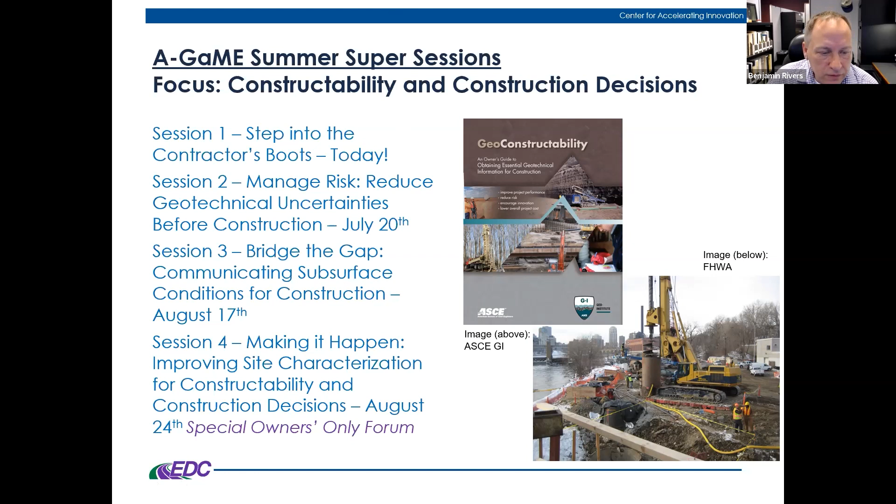So what to expect today? Today, oh, we have one more note.

Recognize that we are having a discussion during this first session, and all of the comments and opinions that we share are from individuals, right? So the viewpoints expressed are of those individuals, and they're not necessarily represented or representative of FHWA or the contractors that are talking here. So we're having a discussion, and just realize that these are opinions and thoughts from individuals. This session is also being recorded and will be available for future viewing.

So today, I think we had a missing slide here. Yeah, so, what to expect today. We have a great lineup of speakers here. Be thinking about these topics as we go along here.

We want to gain a perspective or an understanding of the contractor's perspective on geotechnical related issues, on the A-GaME concept, and what information is important and what problems our contractors experience. We're going to be talking about risks and decisions that are being made from the needs for bidding and construction decisions, looking at the A-GaME, the fundamental part of the A-GaME, which is reducing risks by characterizing conditions better before construction and not necessarily transferring them. That's going to be another point to look for in our discussions. And finally, the value that the contractors bring to us, their experience and insights that we can tap into. Be looking for that in what you see and hear from our speakers today.

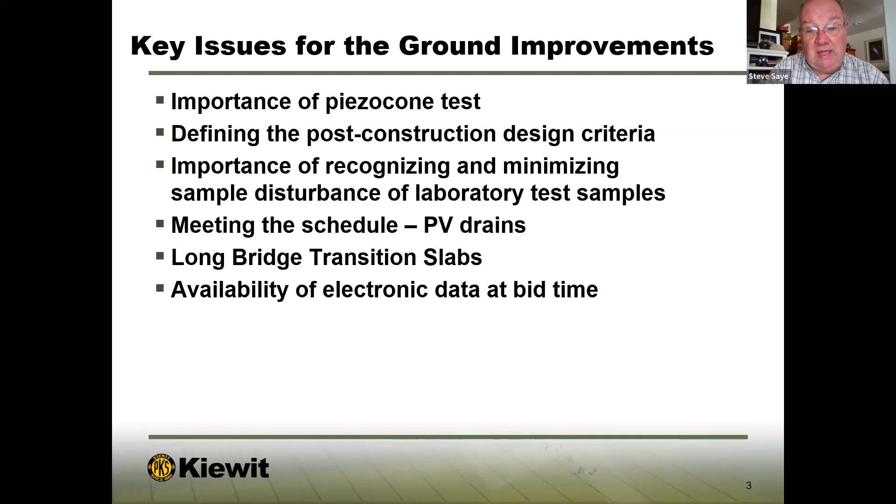In the time that we have, there's a series of things I hope to convey. The first is the importance of the piezo cone test in soft ground projects. The importance of defining what we think the post-construction design criteria would be, to guide the pre-bid evaluations and the final designs. A bit of discussion regarding sample disturbance and how important that is on soft ground projects, and recognizing that a key component of meeting the schedule was the use of prefabricated vertical drains, or wick drains. We'll talk a little about what we learned there. An issue, particularly from design and construction, about the long bridge transition slabs we had, and then a final discussion about availability of electronic information at bid time.

In the 1960s, UDOT essentially raised the interstate as it went through most of downtown Salt Lake City. The construction efforts were to both raise the existing embankments and widen them. And that had the challenge that we knew we were going to need to force more than 1.5 meters of settlement during the construction period.

UDOT, I think, correctly identified that the design build contract was the best way to reach those challenges. And from my perspective, we used the piezocone extensively, and it had the advantage of providing nearly continuous data profiles.

25 years ago, we used it to try to assess selected geotechnical properties. Today, we would use it to do more, and I think the A-GaME is focused on trying to do more with that data. We used it extensively to both supplement and extend the available lab data. And then the local geotechnical engineers taught the team how to easily identify the soil stratigraphy to understand what the critical units were.

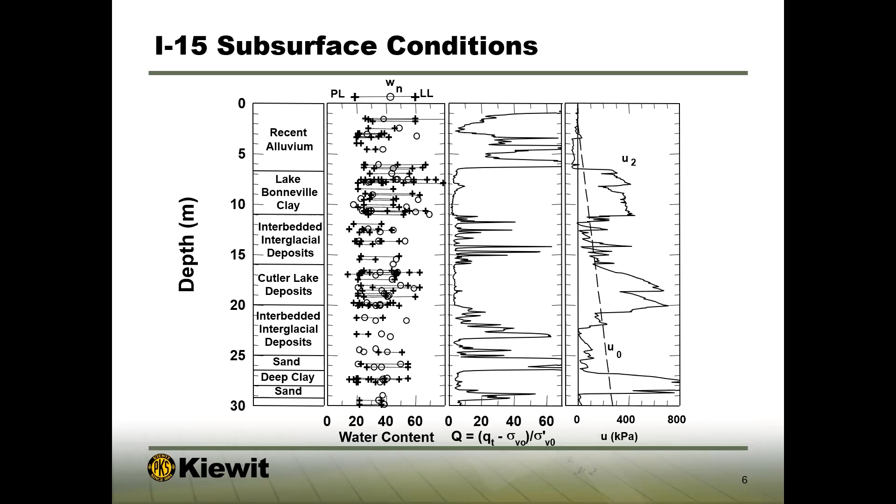So, yeah, in this particular issue, we can see the cone data in the right-hand two columns, the myriad of data for the conventional index properties, and then the word descriptions and the geologic materials in the left-hand column. For our particular project, the Lake Bonneville clay and the Cutler Lake clay deposits were really the bad actors that drove all of the concerns for stability and settlement through the project.

You can see in the interbedded interglacial deposits the spikes of the Q values that are indicative of sand layers and silt layers, and how they might be important to our understanding of the behavior of the wick drains. The other point I would make, something Kiewit generated, is that in the soft ground projects we developed what we thought were the post-construction settlement design criteria.

We developed the post-construction settlement design criteria that we were going to use as a basis for our calculations and designs. That was our method, as the design builder, to communicate to the owner the expectations of the settlement calculations and what we were striving to do.

In those instances, the feedback from UDOT was that the bump at the bridge was considered a critical condition, certainly for the long-term settlement. We had a defined maintenance period of 10 years. So we worked with UDOT to identify an allowable bridge settlement of 51 millimeters, and the roadway adjoining the bridges of 75 millimeters.

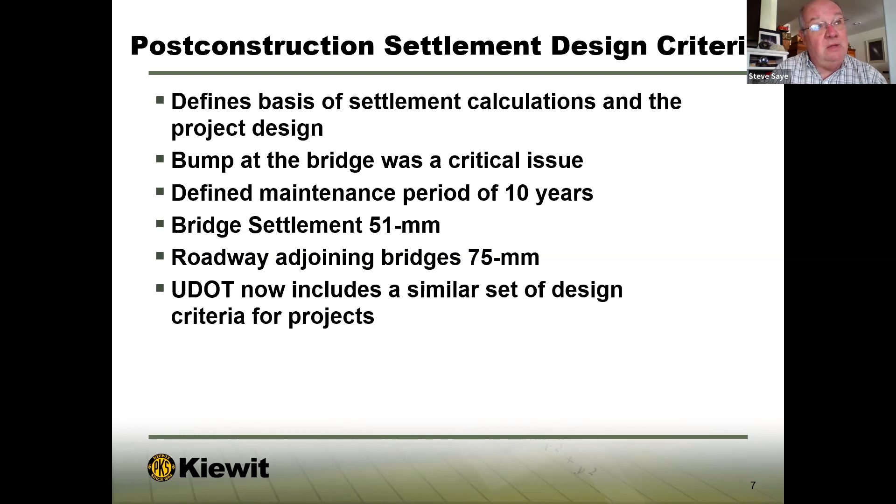Grant Gummow at UDOT was part of our design team, and he's taken this approach to UDOT. In their design build projects currently, we'll see a similar set of guidelines where the owner will establish expectations for the ground improvement designs: amounts of settlement, distribution of settlements, and specific time frames. That's certainly something that grew out of I-15, and we believe it's appropriate for owners to use in all ground improvement projects, being able to communicate the target values for those designs.

An important part of the I-15 efforts was that most of the engineering calculations we did involved consolidation properties: the amount of settlement, the long-term settlement, the rate of settlement, and those inputs to the calculations were all based upon the laboratory test results that we had. Certainly with the fixed completion date, the rate of settlement and the corresponding durations of settlement periods to force this 1.5 meters of settlement out during construction was key to understanding the schedule.

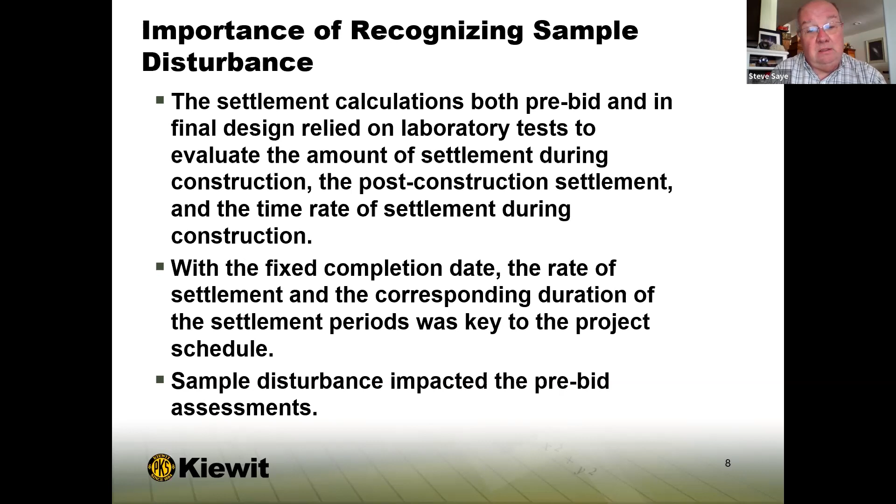And yet, as we dug into that, we found that sample disturbance was a real impact for those pre-bid assessments.

And what I mean by that is we used at that time the Norwegian Geotechnical Institute approach for looking at settlements, essentially looking at the strain we measure in the oedometer test as you're loading it up to the effective overburden stress.

The left-hand sample is what we would consider a bad sample, we're seeing strains of about 7%. On the right-hand side we would have a good sample, with strains of about 2%.

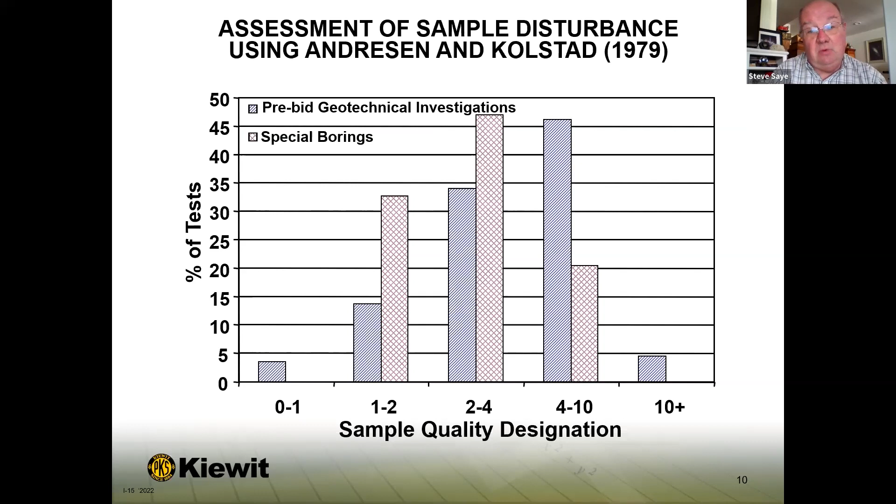If we went back through the boring and laboratory data we had at bid time, you can see from this graph that almost half of the samples would be discarded using a criterion of 4% strain. This particular graph shows that we tried to improve things during the bid or design phase, and we still had a failure rate of about 20%.

In that effort, we would say it's really difficult to develop reliable assessments of settlement properties if the laboratory samples are disturbed. You're probably going to get a picture or appraisal of the ground conditions that's too pessimistic, but you're not going to make the right decision regarding settlement problems.

So I would suggest that every project include an assessment of the issues of sample disturbance, and in some cases non-standard approaches may be necessary to be able to get good samples.

An example is the work we've done post-Katrina for the recovery of New Orleans. The New Orleans District of the Corps came up with a system of 5-inch diameter Shelby tubes that they push continuously, and those rank as probably the best samples I've seen in routine practice. Certainly in New Orleans you need good samples through there.

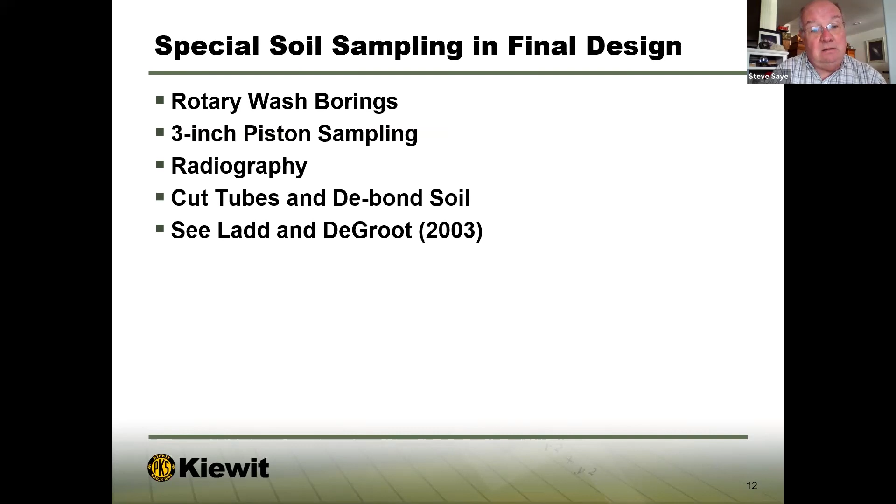MIT has a system of cutting the tubes and debonding the soils, and I would look to you to have a reference - Ladd and DeGroot. These references are attached at the end of the slides as probably the standard of practice to get good samples for testing.

The other thing I'd have you understand is this project was unique in that we had a fixed completion date. We didn't have the opportunity of completing the project 6 months later because the settlements went on too long.

From the experience in the 60s with displacement sand drains, clearly vertical drains were going to be needed if we were going to drain the water out properly. The 60s constructions had settlement periods of 500 to 1,000 days.

We looked at wick drains to be able to go in, with the idea that rather than 2 years, we had a need to push the settlements to occur in about 90 days. That was another unique thing about the I-15 project - we needed to maintain traffic flow during construction, so we only had access to half of the roadway at a particular time.

So we had to build half of the project, flip the traffic onto the new construction, and build the second half. In instances where we had problems associated with stability, that left us with about 90 days to be able to go in through there.

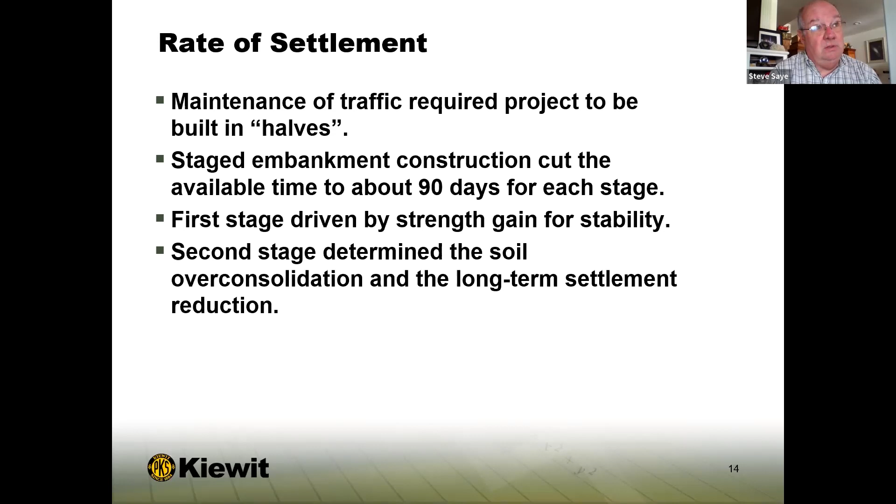Many of you that have worked with trying to look at surcharges, pre-compression, and ground improvements - it's really the duration of the second stage that drives how over-consolidated the soils are and how much improvement you're going to have in the long-term settlements.

So particularly from the estimate and then from the design, the key factor we had was trying to understand what the right drain spacing was and what those settlements were.

We had, fortunately, some experience here in Omaha from a project built in the early 80s. We took those experiences and drew the conclusion that from a construction standpoint, we had to have a good understanding of the soil disturbance and the reduction in permeability caused by the installation of the wick drains, and what the mandrel and anchor configuration was.

What we can see in the upper hand is an example of the mandrel for our project here in Omaha, a relatively large anchor. The center would be a synopsis of the anchor that was used for the Interstate 15 project. You can see it's a more compact situation for the anchor, the stiffening arm, and a much shorter bar.

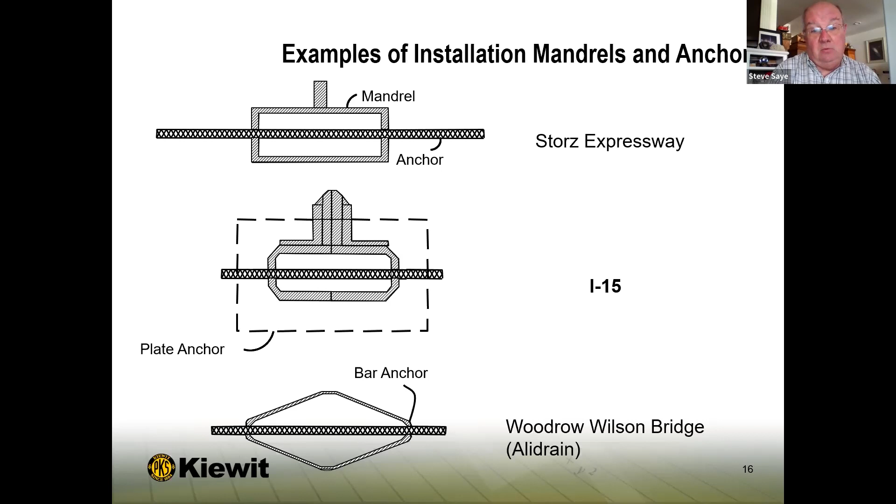The key concern we had pre-bid, and a key lesson learned from the ground improvements at I-15, is that you could put the wick drains too close together, so that the disturbance caused by the mandrel and anchor combinations overwhelms the benefits of putting the wick drains closer together.

In this particular example, we actually did a test fill in the first phases of construction at I-15. We put the drains in at 3 different spacings, and at the middle spacing we had 2 different anchor installations.

The dashed line on the graph represents the theoretical calculations based on the settlement behavior at the larger drain spacing. Looking at that graph, when we moved from 2 meter spacings to 1.5 and then to 1 meter, the time for settlement didn't decrease. That says the disturbance caused by the mandrel and anchor at closer spacings obliterated any benefit of installing the drains closer together.

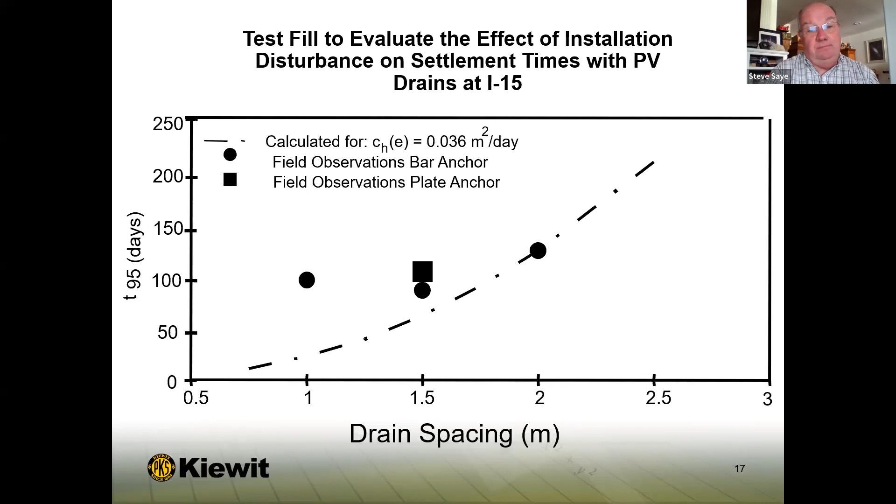I'll refer to a publication we put together in 2001 that tries to provide some criteria for what that excessive disturbance line would be. There's some math with which to judge what's too close regarding wick drain installation. But clearly a key lesson of I-15 is there are limits to how fast you can make settlement occur when using wick drains, so you have to select what that critical drain spacing is.

You have to look at your mandrel and anchor configurations, and then there'll be a settlement time that you're just going to have to live with, because it's not going to go any faster.

The other thing, looking back on the project and at the long-term monitoring UDOT has done after construction, is that now 20 years later, the project rides very well.

A key component of that is that we recognized we had to do something structurally to address the bump at the bridge. We had what was called on the project a jumbo slab, a reinforced slab 16 meters long that provided a transition from the grade-supported surcharge ground and the pile-supported abutment area. Since then, Briaud and others have looked at a tolerable bump as being about a slope of 1 in 200, and that's essentially what we believe the jumbo slab has provided.

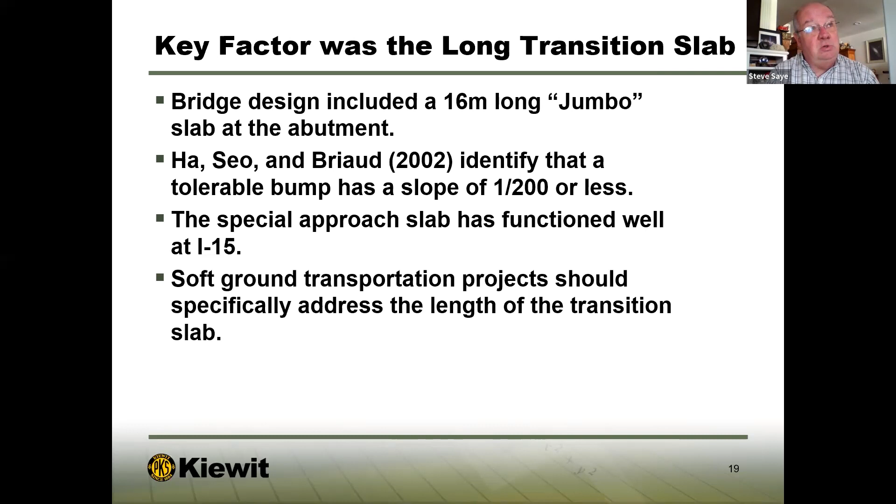Yet in other projects I've seen after I-15, I find in design-build settings that oftentimes this transition slab is overlooked, and many designers and contractors want to use whatever the standard section is. A further lesson learned is that if you have a soft ground project, you really, as a designer and design-builder, need to look at the length of the transition slab, how it's designed, and whether that's really compatible with your expectations and calculations for the long-term settlements of the areas you're preparing in other manners.

Another lesson I'd have for you is recognition that phased construction creates a myriad of challenges, particularly as it relates to access and surcharge placement, and not being able to cover all of the embankment at one time. Lots of edge effects and all that. We handled it for I-15 through the design build process, but there were many instances where specific coordination was required to maintain the access ramps and the movement and maintenance of traffic, with many miles of temporary walls needed to support the surcharge and allow the phasing. I'd also have you recognize that as the thickness of the soft or consolidating layer gets deeper, it makes these problems more and more important.

From a 2020 perspective, I'd offer that it's increasingly important for project data to be available electronically. I know that's a discussion point of the A-GaME, but certainly boring logs and CPT records electronically are important. Design builders and Kiewit would be looking to input information into a three-dimensional system such as MicroStation, so having all the information electronically is important. You need survey locations because in this world of 3D design, we need to know the position of the borings and the soil layers in the three-dimensional system.

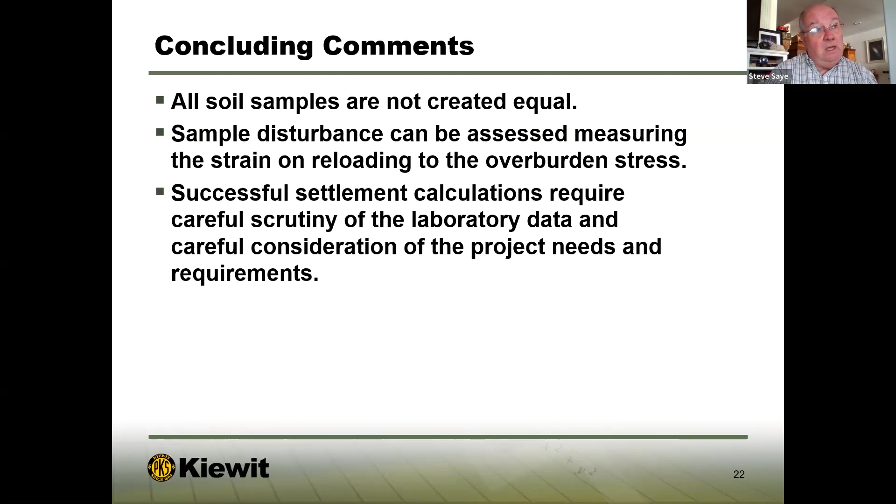A few concluding comments: I hope you come away with the idea that all soil samples are not created equal, and that particularly on soft ground projects—but I'd believe on all projects—the DOTs, designers, and design build teams have to go in and make an appraisal of whether sample disturbance has occurred. We've shown you the way we've used that at I-15. Successful settlement calculation—being able to predict the behavior of the ground—requires careful scrutiny of all the data and considerations.

I thank you for your time. I understand we'll have some questions on screen, and I've got a contact if people would like to reach out. The last page lists a series of key references that we use for designers, as a takeaway for the audience to gain a good understanding of what we actually did at I-15.

Excellent. Thank you very much, Steve. Great presentation, a lot of thought-generating content, especially looking at the value of in situ testing and how that can help characterize the problems you face.

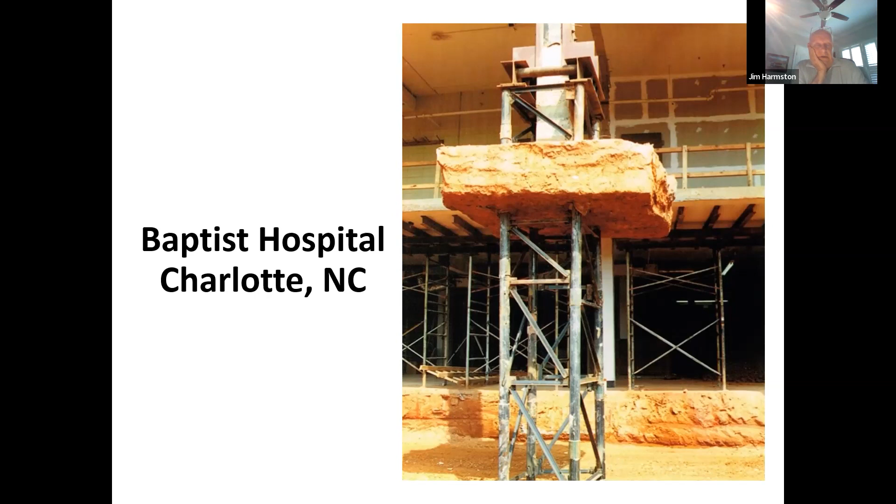Can you change the slide? There's a picture — there are 2 more footings over here on the left you can't see. Okay, change the slide.

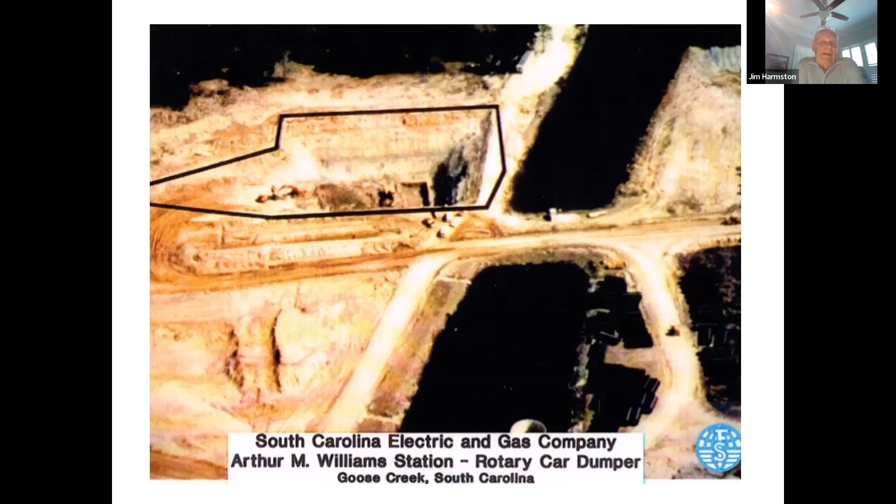You've probably heard of vibrated beam slurry walls. They get quite controversial — do they work? They work good, I'd say excellent, up to 40, 50, maybe even 60 feet. I would not put one in deeper than that. But how do they work? Let's go to the next slide.

You take a set of fixed leads on a crane and drive a beam into the ground, and the beam has nozzles on the bottom. As you drive the beam, you pump slurry down there. On that particular project, we drove down into the clay, the Cooper River Formation, about 40 feet down. Then as you extract the beam, you keep pumping the slurry, and when it comes all the way out, you back up — about 30 inches — and redrive the beam. Think of it like a sewing machine. It's a very simple process.

Does it work? In most cases it works very well if used in the right place. Change slide. Here's a picture of the wall after it was excavated — the wall there is about 4 to 5 inches wide. Change.

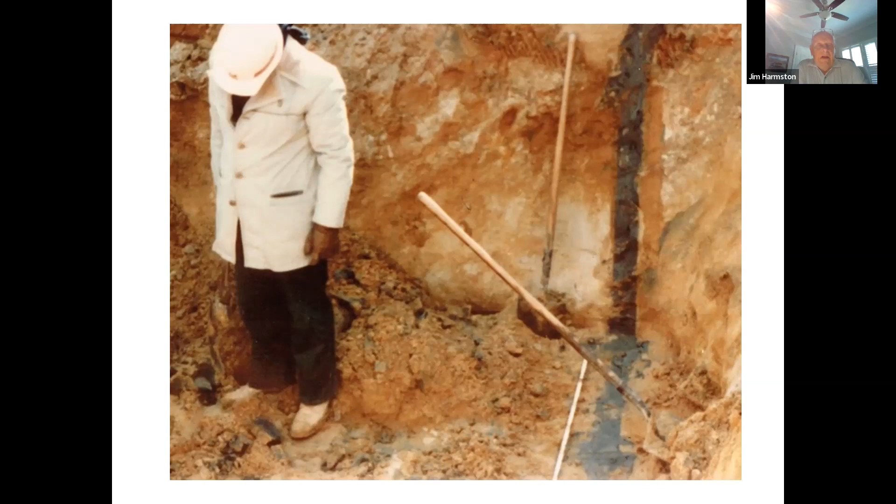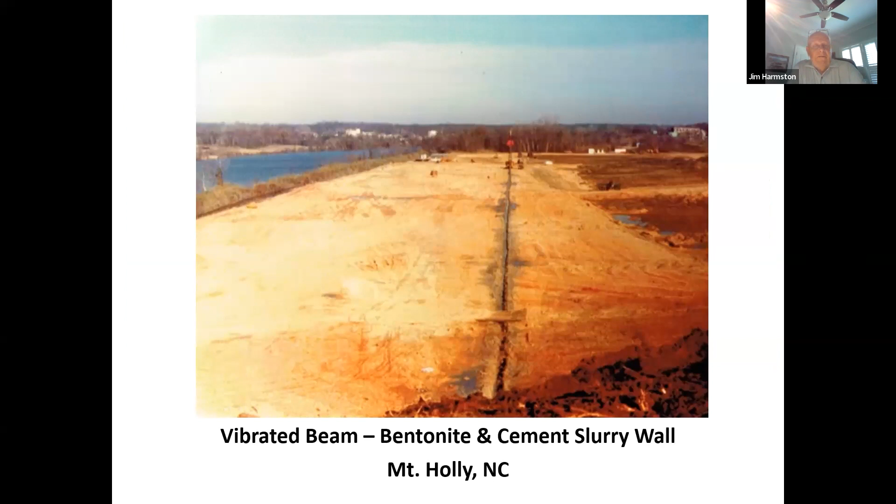This is another picture of that vibrated beam slurry wall. This is a job in Mount Holly, a chemical plant. This wall here was about 30 foot deep, and that's the Catawba River on the left-hand side. Then they built a new dam on top of it for a holding pond.

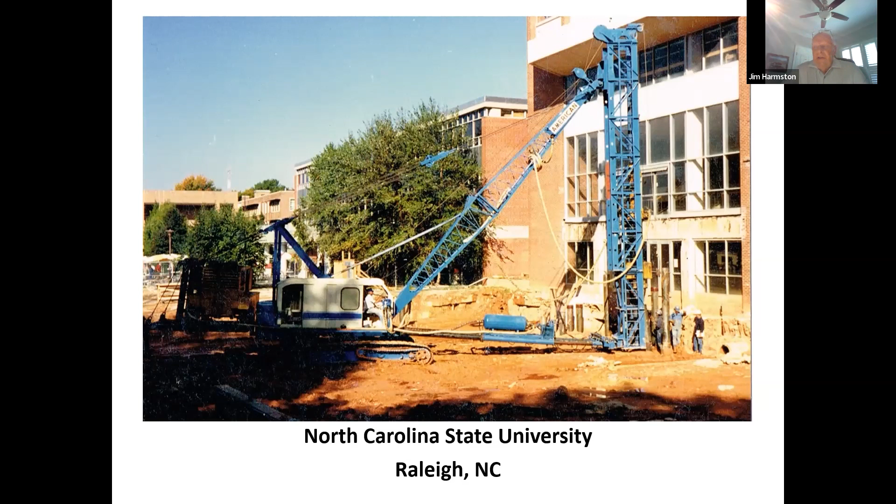We had a mile of sheet pile here, and we did it in one season.

What they did is they found some ore boats up in Sheboygan, Wisconsin, and Raymond rented these boats. I'm running this 3900 here, and they took the boats over to Inland Steel and loaded all the sheet pile on this boat and loaded all the H-beams on the other boat.

Towed it back over, and we went to work. No work barges, no loading barges and unloading barges - we had all the material right here on the ship. We did this job in one season on the lake, and everybody else was figuring 2 to 3 seasons. But like I say, Raymond was a very creative company.

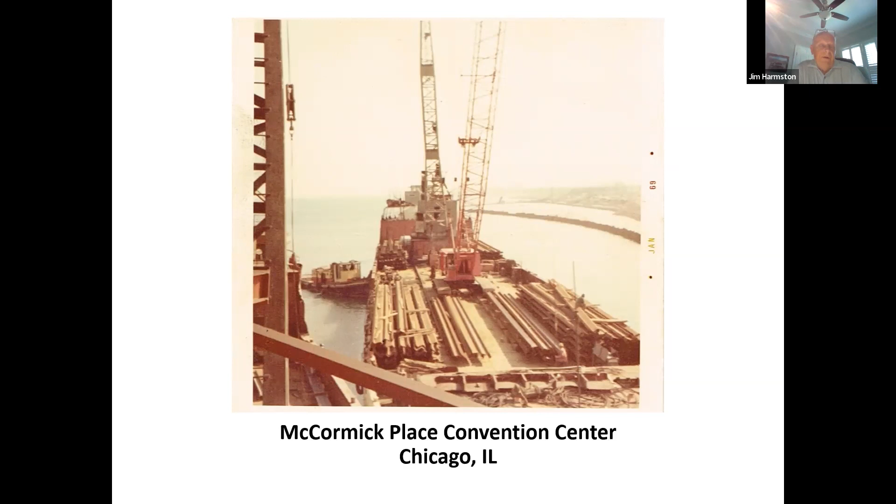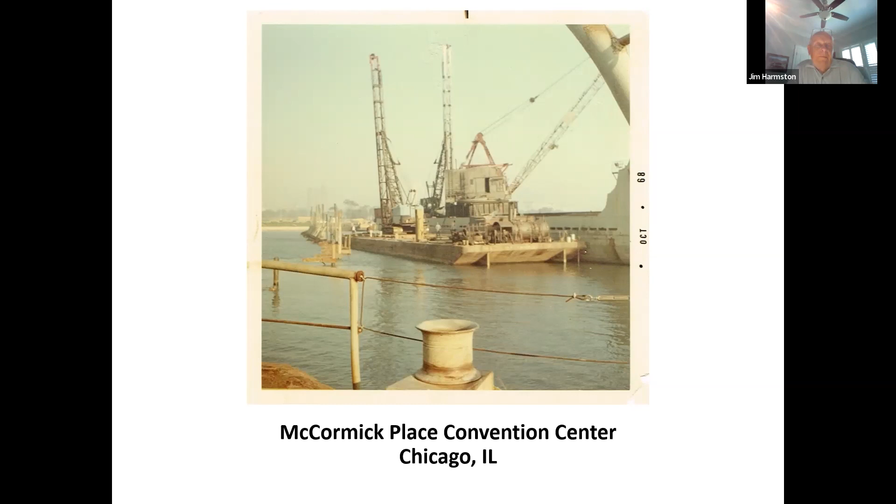Here we had, see the Whirley crane on this boat here. There's one of the rigs here driving some support piles with a template, and there's the other rig back there.

And I wrote to him, and it was a piece of, if you can remember that candy you had as a kid on a piece of paper with all the little dots on it, that's what it looked like. What it was, was a root repellent. You put it in here, behind the waterproofing, and supposedly, as they tested it, it would take and repel the roots rather than push the wall over. Well, it was pretty good.

As a matter of fact, FHWA came to the office one day and said, would you mind if we consider this on our 421 project from Winston-Salem to Boone? I said go ahead, and actually even gave them the drawings and everything else to take back. It worked very well. I'm not sure if they still make it or not, because it's probably about 15 years old. But it was called BioBarrier, and it came from Eli Lilly. I thought it'd be great on sidewalks too, where it would repel tree roots rather than buckle the sidewalk.

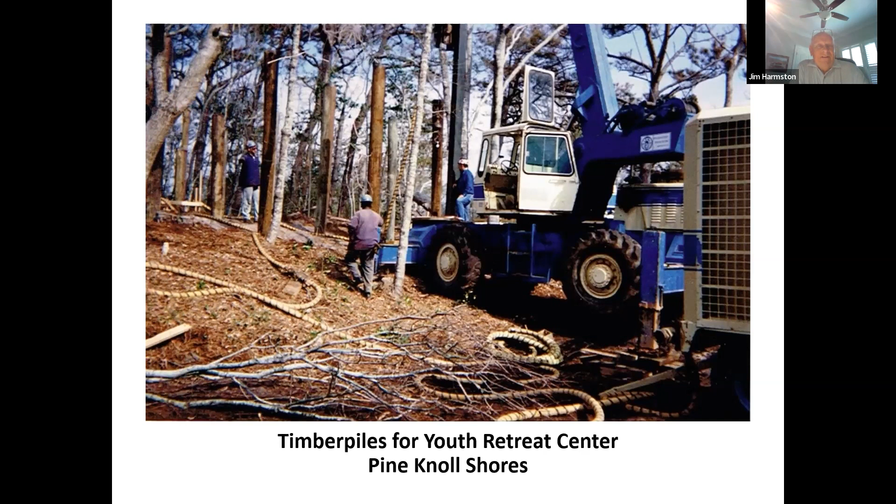Is that the last one? I think that's the last one. Excellent. Oh, okay. All right.

Jim, you have a lot of stories. I think that if I had to sum up what you shared here, it's really a mosaic of the experience that you bring, and just the practical considerations, constructability considerations that, if we tapped into your experience and your insights, that will go a long way in solving a lot of the problems, or preventing some of those problems. Is that a fair statement?

Yeah, I've done a lot of, as you want to say, consulting is the right word, but I don't even consider it consulting. I've visited jobs with engineers beforehand. We did a job down in Charlotte. I don't remember the name of the building, but the building was settling. This is like maybe an 8-story building, and they're moving furniture in there, and they couldn't even put the chairs down. The chairs are sliding across the floor, and the owner had a fit.

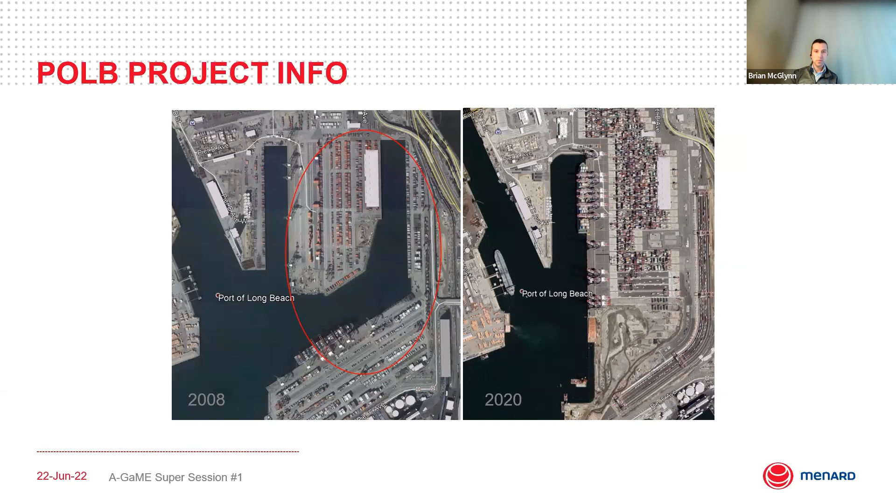Before I get into the project, Steve did a pretty good job talking about wick drains in his presentation, but I'll give a quick recap of how they work. Wick drains are typically used in fine grained soils, so clays or silty material. They shorten the drainage path that excess pore water pressure has to travel, accelerating consolidation. They're typically installed at 3 to 7 foot spacing, and depths can go as deep as the equipment can support. With our conventional equipment, we max out around 150 feet. In general, you're targeting clays, potentially soft clays or silt layers that could cause settlement issues for the project.

For this project, we were involved as a subcontractor. The general contract, as it related to our work, had 4 key areas. There was demolition of existing port infrastructure before we got there. This mattered because our equipment and material is designed to penetrate soft soils, not concrete rubble, so it was important to know what was being demolished and where the demolished material would be placed. Fortunately, the engineer at the port did not expect us to penetrate soft soils in those deposit areas. The next step involved dredging and infilling this slip with material from several sources called out in the contract plans, and this was ultimately the material that would require wick drains. This is where we came into the picture.

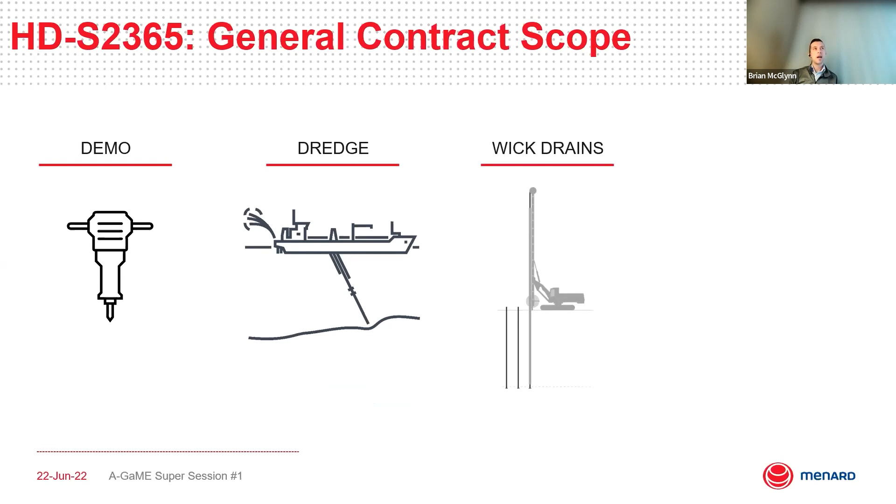We were installing wick drains targeted about 75 feet deep. What followed was a surcharge program in the area, about 20 to 25 feet of surcharge. A settlement monitoring period would begin after the surcharge was placed. Once settlement occurred, the surcharge would be removed, the area rough graded, and then handed over to a separate contract where the final port infrastructure—container yard, paving, cranes—would all be installed.

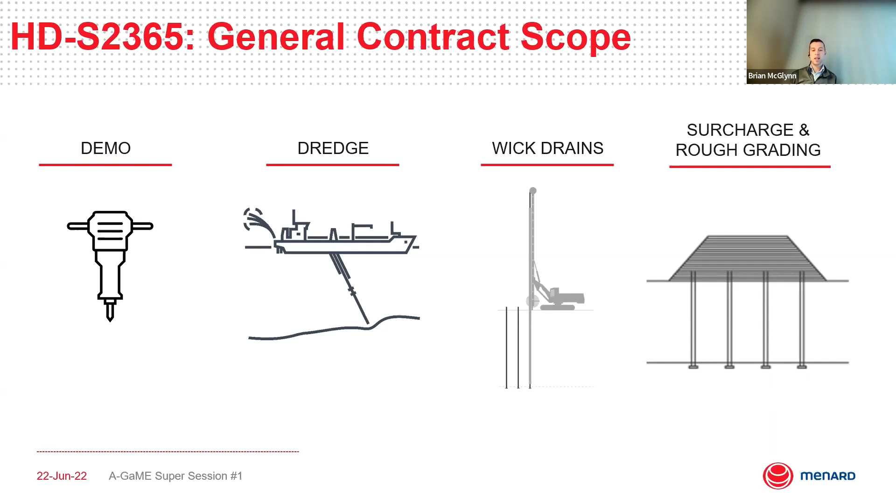For us, the soil conditions—when I say limited geotech scope, maybe that's a little unfair—we did have 4 borings in the area. In general, the depth of the soil borings ranged anywhere from 70 to 90 feet. Information we wish we could receive on all our projects included what sort of hammer was used, the hammer efficiency, the coordinates of where the borings were performed, and the elevations of the borings. This is where we ran into our first challenge.

For the elevations, one boring is at minus 52 feet with about 50 feet of water above it. The second boring is about minus 65, minus 60 feet, and then minus 45 feet. At the time of the bid, the information we had available for the slip fill area was mostly where the mud line was. It was pretty clear from the borings that there was soft material there, but everything above the mud line was to be determined.

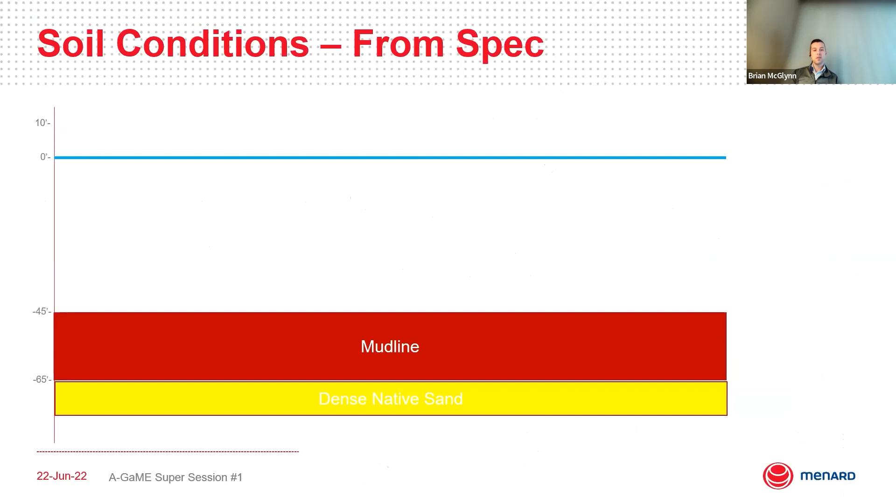This was September 2017, and this was essentially the information we had. We knew there was dense native sand beginning around minus 65. We knew where the mud line was. And we knew the material to be placed would be pumped in from multiple different sources. We had reviewed the specifications for the dredging and understood that debris and large cobbles would be removed from the area, so we could reasonably expect this shouldn't present any penetration issues. The last 15 feet or so was going to be mechanically placed.

There were previous wick drain contracts that had been undertaken at the Port of Long Beach, and there's plenty of surcharge material. Some of that surcharge was going to become the new fill, and some of it would work as additional surcharge under this contract. But this material, we knew, would have big pieces of earth moving equipment on it. It may be, while not compacted in an engineered way, compacted in such a way that it could present challenges for wick drain installation.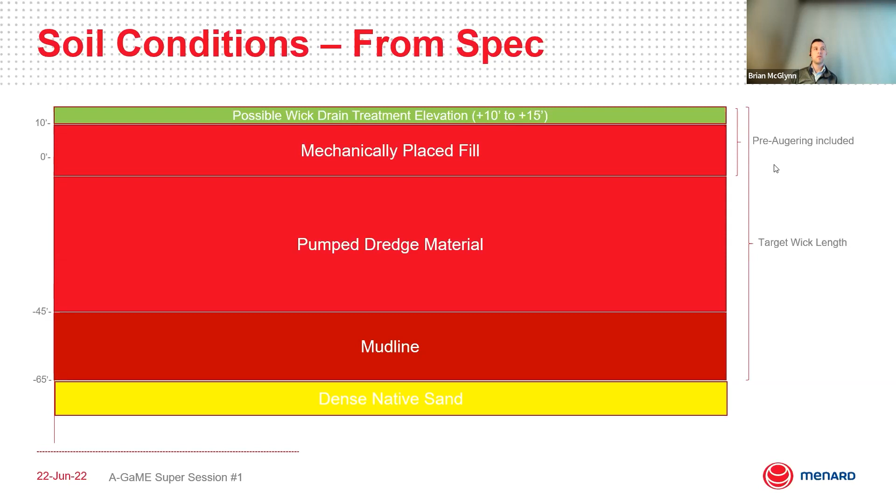Per the spec, the wicks would be installed anywhere from a working elevation of plus 10 to plus 15 at the site. As I mentioned, our target wick length was about 75 feet, up to 80 feet, depending on the working elevation. One consideration was that this top 25 feet, or top 20 feet, may prove a little difficult. So we had actually carried pre-augering for that material as incidental to the wick drain pricing.

So then here we are, December 2018. Over a year has passed since we had initially bid, and this was the before time of rapid inflation. So we were actually able to hold our pricing steady throughout this period.

But this is essentially the total wick drain area, as well as where it had been infilled to date. We were still about a month or two out from mobilization for the wick installation. We'd be starting in this G1 area.

So we mobilized at the end of January, beginning of February. They went out and did CPTs in this G1 area. You can see on the plot, in general, the scope was somewhat limited, at different elevations. And then these are the results we got.

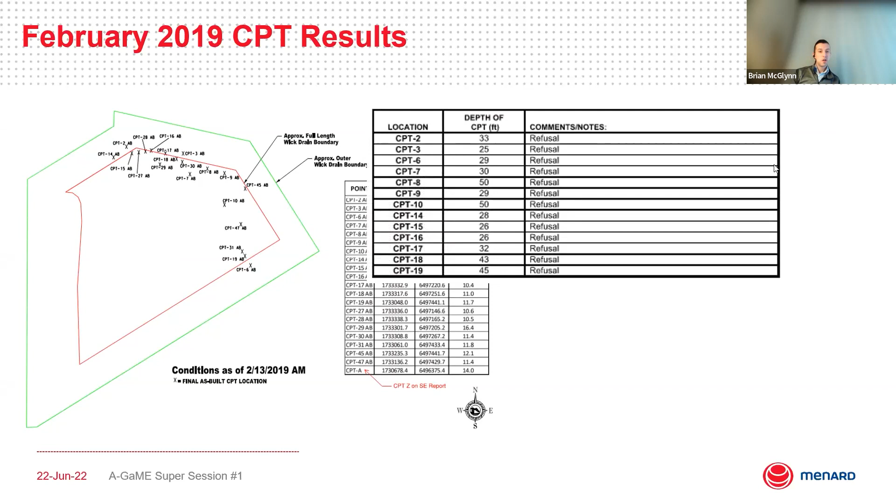In general, very shallow refusals when considering that the wick drains would have to be installed 75 to 80 feet deep, continuing essentially through all the CPTs taken in this area. So at this stage, we're just about to start the wick drain installation.

So the question kind of arises: would we consider this to be a change of conditions? Obviously, with wick drains, we're expecting to install through very soft material. The CPT profiles showed that some of this material was much sandier than what you would typically expect for a wick drain installation.

But ultimately, we were relying on the specifications as written. And within the specification, there was a minimum equipment push force, which is very common on public bids to see. It was 40,000 pounds. So we figured, okay, we have the equipment that can meet or exceed that.

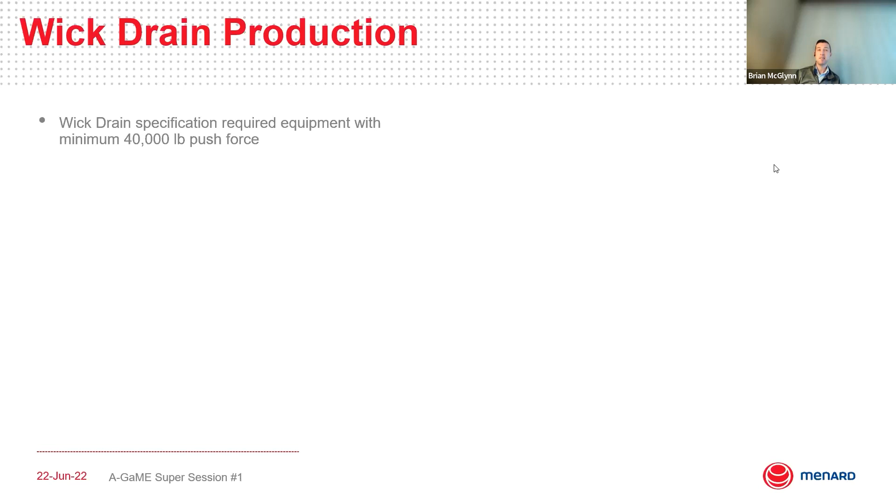We understand that while the soil conditions weren't necessarily known at the time of the wick drain design, this was probably considered, and our wick equipment would be fine. So it's not a change of conditions, it's just what the conditions are.

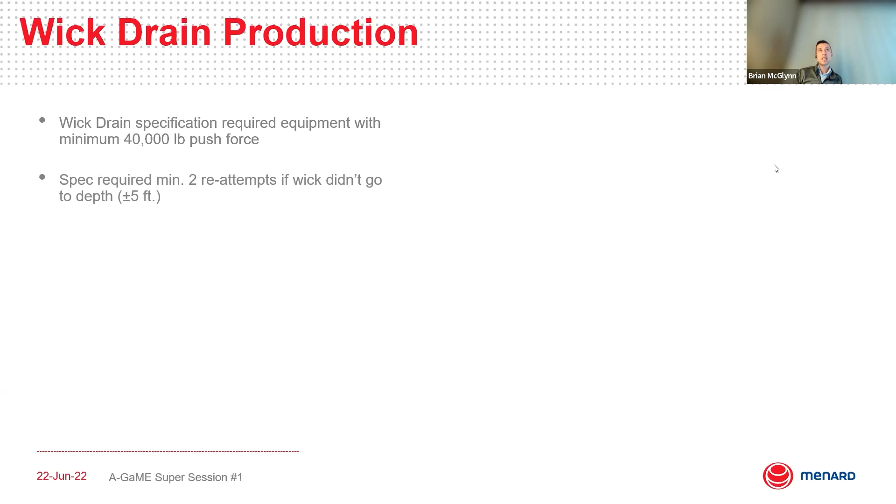The spec also required a minimum of 2 reattempts if the wick didn't go to depth. At the start of the project, that depth was within plus or minus 5 feet of the termination criteria. So here's a picture of our machine. We're working off of an 80 ton excavator, so 160,000 pounds, push force of almost 50,000 pounds.

The issue we ran into, particularly with this 5 foot requirement, was that we were performing a number of reattempts. This was a case where we were meeting the spirit of the spec, but ultimately we weren't happy, because we were essentially getting paid for 3 wick drains for every wick drain that we needed to install, but it was just really tying up our people, tying up the schedule.

And so ultimately what this led to was, as we just kind of slogged our way across the site, in the final area, they had decided that, okay, well, how this worked out with the earthwork contractor, they were going to run out of space to work. So they said, okay, we'll have them place the surcharge in the final area to keep them busy while you finish out working in this second to last area.

That way, they don't have to demobilize and remobilize. So we went from having a working elevation of plus 10, plus 15 to now having to work from plus 34, which this was clearly a change of conditions for us. And ultimately what it led to was...

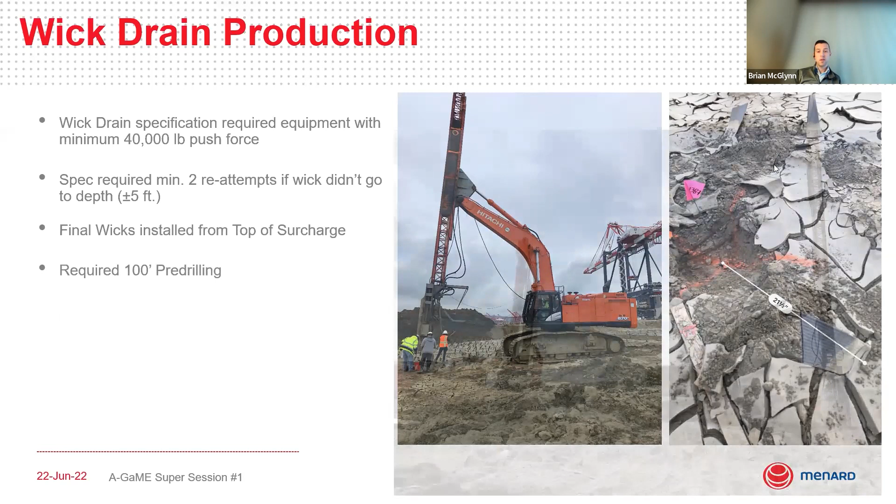100-foot pre-drilling being performed from the top of the surcharge pile. This was work that we actually did not perform. The general contractor had subcontracted a dedicated pre-drilling company to do it. And our wick drain production probably went from, I don't know, like 250, 300 a day to 50 a day.

We could only install as many holes as the pre-drilling could open up for us. And we had to work in such a way that any sort of aging effects of the pre-drilled hole could result in shallow refusal again. So it was just a slog to really get through.

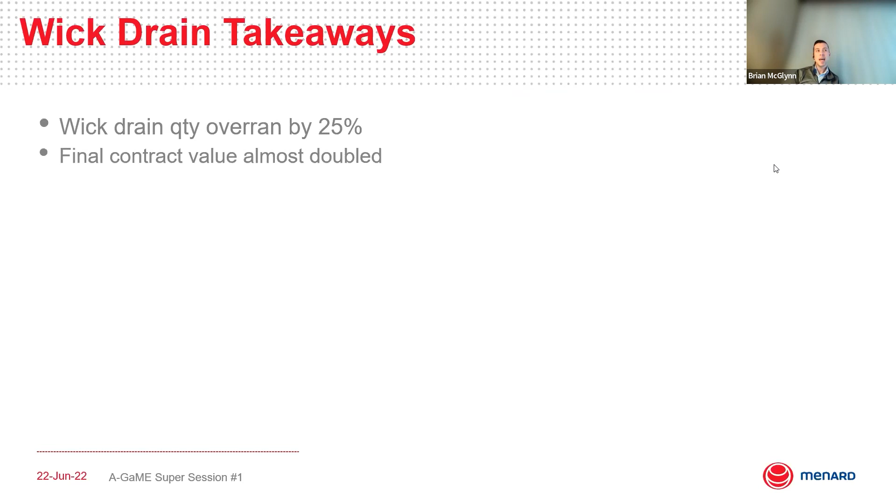Ultimately, the takeaways on this was, we had a wick drain quantity overrun of about 25%. The final contract value for us as the wick drain installer almost doubled. At the start, we were probably only about, I would say, less than 2% of the overall contract value. And this doesn't even include the final pre-drilling costs. I think that in itself either met or exceeded the cost of the wick drain installation just to work that final area.

This project had multiple delays on our end where we would be working, we'd run out of areas, we'd be told to go on standby for a couple of weeks while they tried to figure out what sort of approach we'd want to take in different areas. Ultimately, in those different areas, there wasn't much additional geotech exploration nor settlement monitoring information taken into account when coming up with potential approaches. So ultimately, we'd have to leave the site for a couple of weeks and then come back and just keep trying with the approaches we were attempting.

It also affected us not just on this project, but we had some of our best operators on the site. It's a very challenging site, and it occupied their time for almost a full calendar year. It had run-on effects where we had planned on using some of this equipment and some of these people at different project sites, but we just could not free them up, really due to the geotechnical conditions we ran into at the site.

So this is the picture I'll end it on. This is one of our mandrels that broke off in a hole from the top of the surcharge pile. It illustrates the additional challenges that compound upon themselves when you don't have great geotechnical information. So now instead of us just having to cut this mandrel maybe down a couple feet from existing grade, it's now sticking about 25 feet up from final grade for the container terminal. This one piece of steel probably resulted in 5 RFIs and 2 or 3 coordination meetings as to how we're going to handle removing this in light of all the surcharging and final grading scopes of work that had to follow the wick drains. So I thank you for your time.

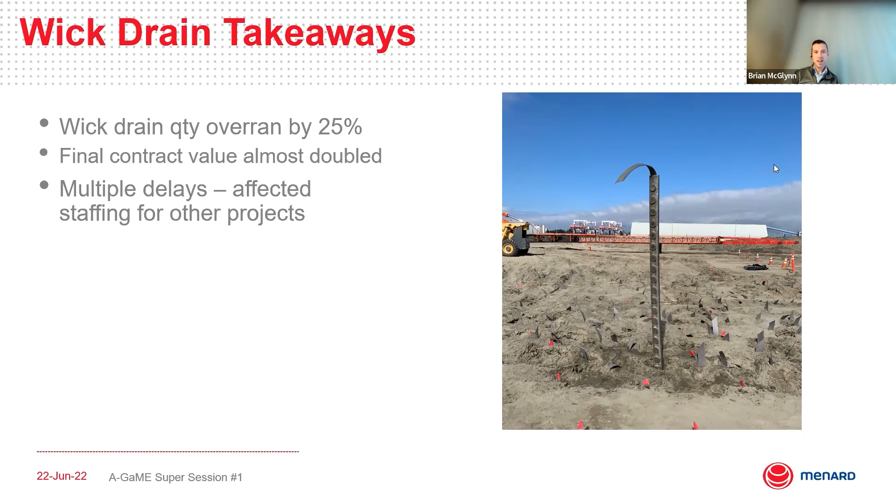Are there any questions? Yeah, absolutely. Great presentation, Brian. It does illustrate the impacts on you when we don't have the information you need. I have one question - you mentioned having boring information up front with energies, with locations that were accurate, which is a good thing. In your comparison with the cone penetration test and the data that you had, what did you see? Obviously two different tests, but were there details within the materials that you were seeing with the CPT results that just weren't there early on?

Yeah, and so I think that was part of the challenge. Essentially, where the depths of the CPTs all hit refusal was still about 30 to 35 feet above where the start of the borings and that information was. So all the borings were taken from the water into the mud line, and the CPTs were all performed from the surface, after we had already started wick drain installation. So it was a challenge because we didn't know what we were going to encounter, and we also didn't know what was below that refusal. It very much could have made sense that the material below it could have been very soft clays or silts that would require wick drains. So it wasn't enough for us to just say, look, you hit refusal 30, 35 feet down, let's just install the wicks to 30, 35 feet.

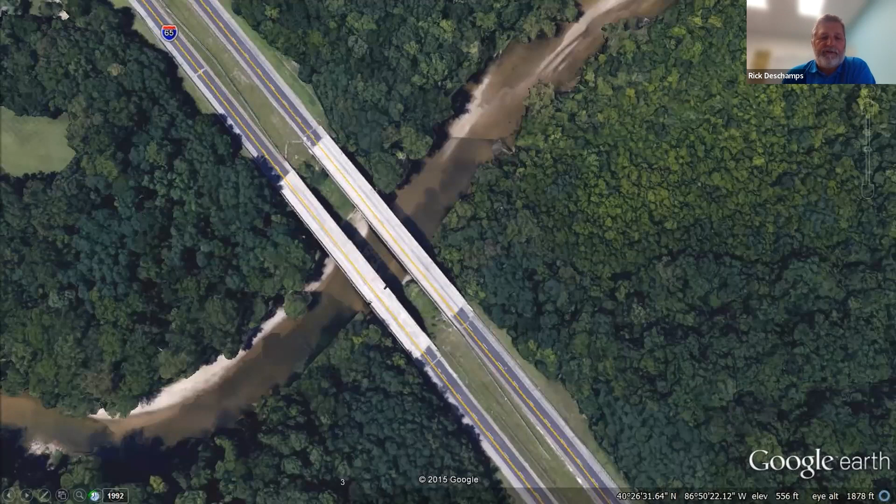Now, if you know Indiana, especially the northern part, it's extremely flat, a big glacial till plain, but the river valley was incised about 75 feet below grade, and you can see the floodplain down below.

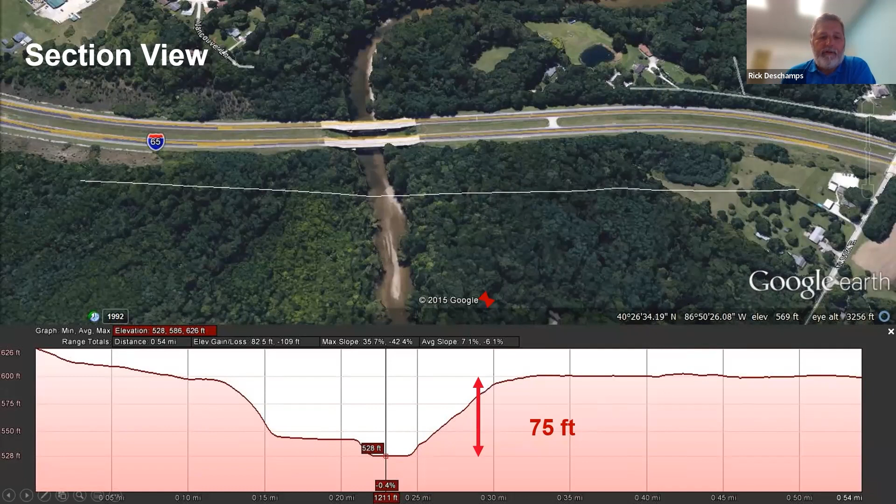At the time, there were 4 contract borings, both at the abutments and lower on the floodplain and on one of the slopes, and they all showed pretty much the same thing: primarily glacial till over a dense glacial outwash. Looking at them in more detail, there was a layer within the glacial till that was clayier than the remaining till, and more sandy below that zone.

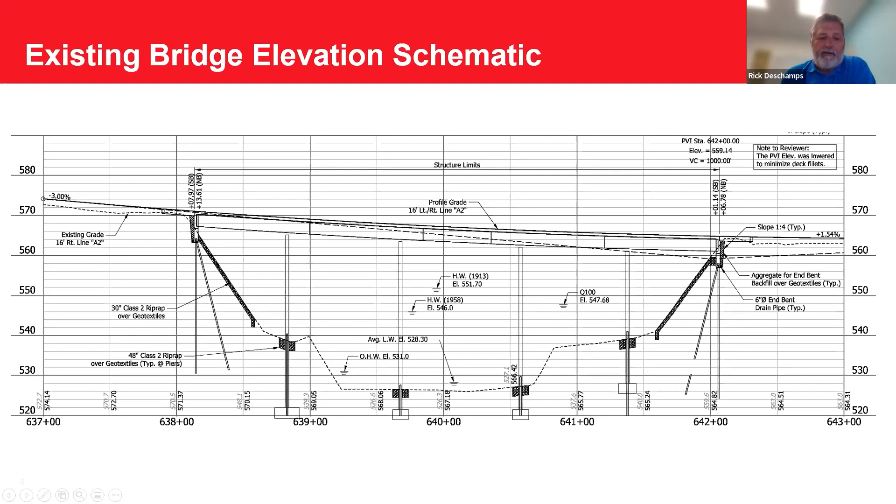If you look at the planned elevation view of the new structure, you can see right away that it's been planned to be constructed on driven piles. So the new portions of the bridge would be on driven piles. H piles were shown on the schematic drawings for the design build contract, and H piles were recommended by the geotechnical engineer in the geotechnical report.

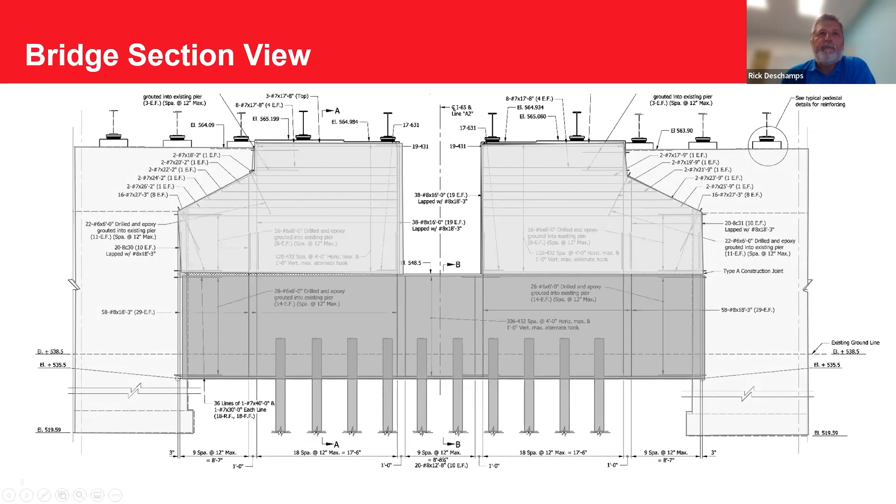So this is a view of the work that's going to be done. You've got your existing piers in gray on both sides supporting the existing lanes. The idea was to drive piles in between those two piers, put a cap on top of those piles that would connect to the existing piers, and then build up those piers to be able to support the two new lanes on top.

The discussions began: was the pier safe? Could something be done to temporarily open up the bridge? And you can imagine there was pretty significant political pressure to get things moving.

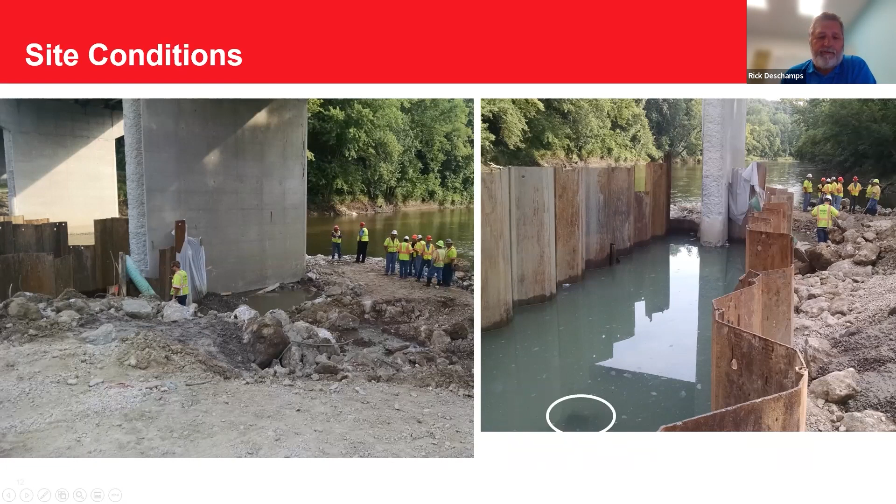As I said, the contractors were involved. What were some of the ideas for stabilizing the pier? Remember that schedule is critical, and all options would be vetted with Indiana DOT and FHWA. What were some things to consider from the contractor standpoint? We wanted to identify the cause of failure before designing the repair, and get our hands on all the information we could, including historical data. The concern was: it's settled, but is it at risk of settling even more? Could the work we're doing cause a problem for any other piers? Because we wanted to do no harm.

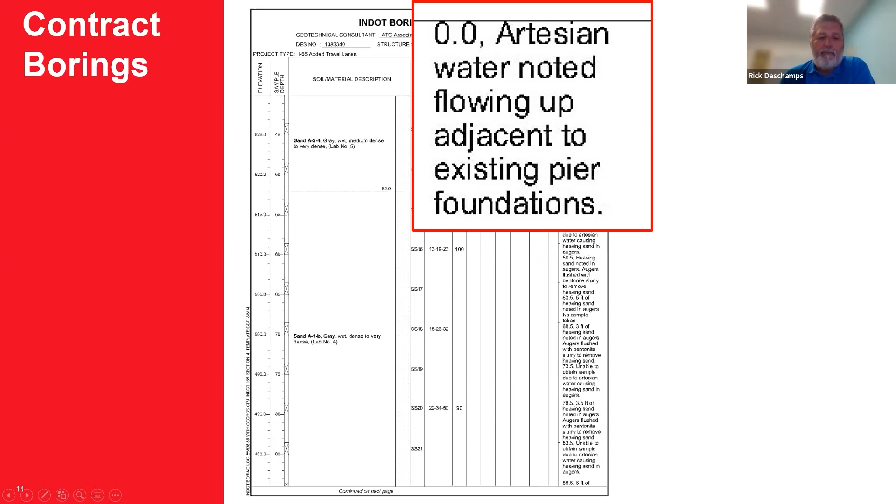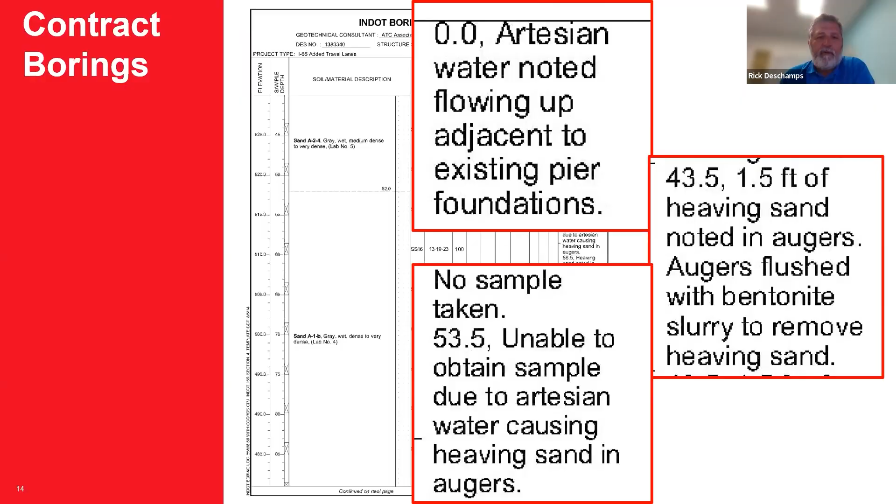It was pretty evident early on that there was an artesian condition here, which would have caused the elevated waters inside the cofferdams. That was reinforced when looking at the most recent and historical borings that came with the contract. Notes indicated artesian water flowing up adjacent to existing piers - even before drilling, you could see water coming up next to piers already constructed. There were also notes about heaving sands within the augers, requiring bentonite, and the inability to get good quality samples because of heaving sands at various depths. This was reinforced by historical borings, which indicated heaving sands made it impossible to get samples at various depths, and that the recorded SPT N-values were probably not representative of the in situ conditions.

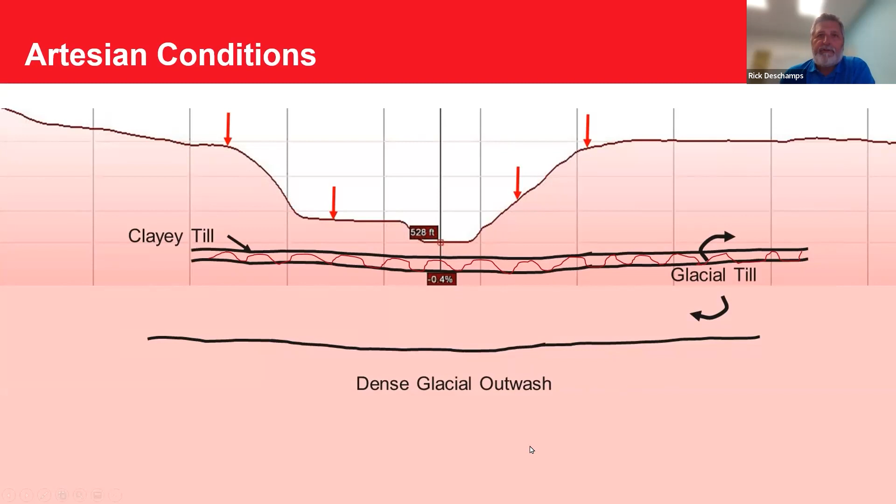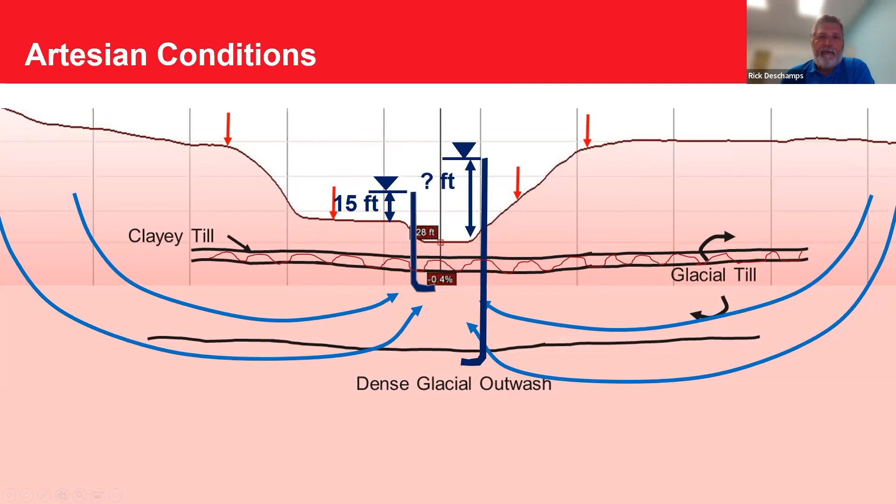Even though Indiana is really flat, this valley is 75 feet down, and all the infiltration coming down can recharge this zone. Maybe this outwash daylighted someplace, creating an infill area that could be charged with water. But this clay till layer ended up being an aquiclude that created part of the issues we'll discuss. The piezometric head right below that aquiclude was something like 15 feet above the floodplain, and we expected it would be even higher further down the glacial outwash, since you wouldn't have the head loss through the remainder of the till. The cones that went down through here to gauge that really refused in the glacial outwash. So the hypothesis was that the driven piles broke through this layer and opened up an avenue for flow on the outside, allowing the artesian pressure to carry materials.

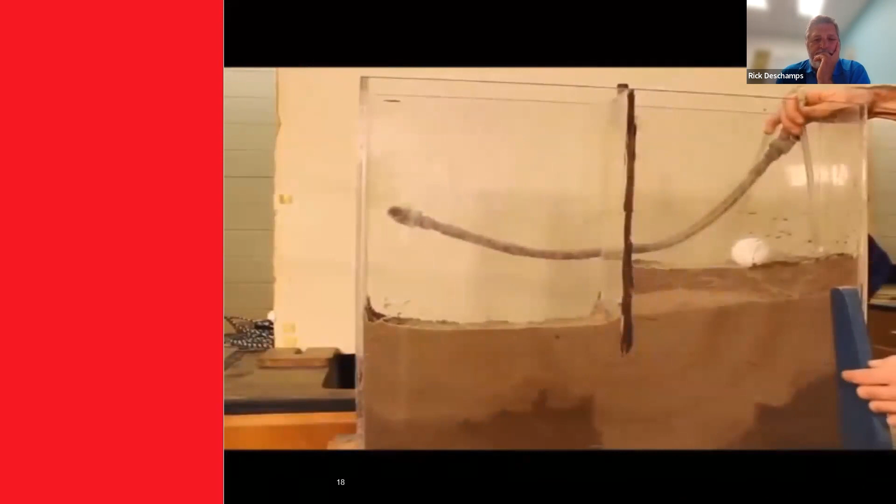I've got a little video here to give you a feel for the importance of piping and erosion. This is a video showing piping underneath a sheet pile dam in a lab model. Here we have the dam - the black line in the center. We're going to add water to the right side. It will flow through the soil on the bottom and come out the left side. If the head difference gets too big, we'll see a failure. Of course, I wouldn't be showing you this if the head difference wasn't going to get too big.

So we continue to add water. The soil's pretty dry, so you can see the wetting front moving down. This is going way too slowly, so let's pick up the pace. Here we go - there's the wetting front moving around, and some people in the background moving around.

So we'll see the wetting front almost complete, at which point we'll see some heaves start to occur just to the left of the tip of the sheet pile.

Here's a little more. There's a heave starting to take place. It's going to blow any second now. I think we're going to see it go.

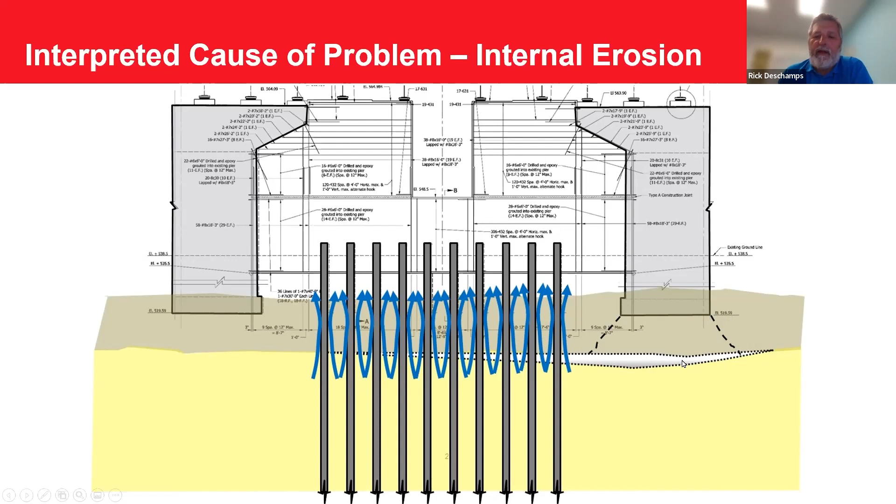So in concept, this dense layer probably bridged for a while until this cavity got to be so big that it actually collapsed, and that's why the settlement was so abrupt.

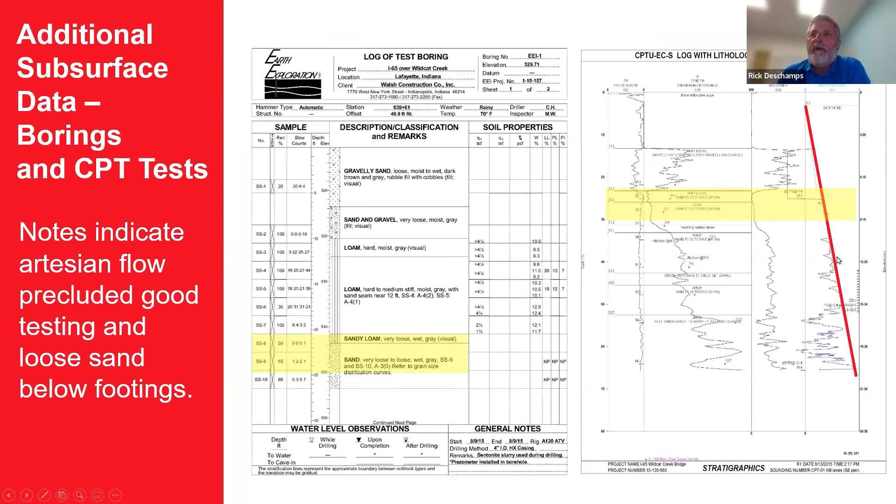And similarly in the cone penetration test, the tip resistance has dropped off dramatically and indicated loose sands. And also, if you look at the pore water pressure measurements, the line was greater than hydrostatic.

So now the idea is we understand the problem, so how are we going to solve it, and what can we do to fix it? The goal is we don't want to cause any additional settlement as part of the fix. Whatever we do has got to be able to address these artesian conditions so that ultimately we can carry the load.

The approach that we chose to present was the use of micropiles. Micropiles are fairly versatile in terms of being able to get into different areas, especially below the bridge deck that was in place. An important part of that was being able to drill with grout, and I'll explain the details, but by drilling with grout, we could offset the water pressure from the artesian water conditions.

So that we could safely get the piles in place. The other approach we included was to do some compaction grouting - get underneath the slab or the existing spread footing and do some compaction grouting to support it while we're getting the piles in place to ultimately carry the load.

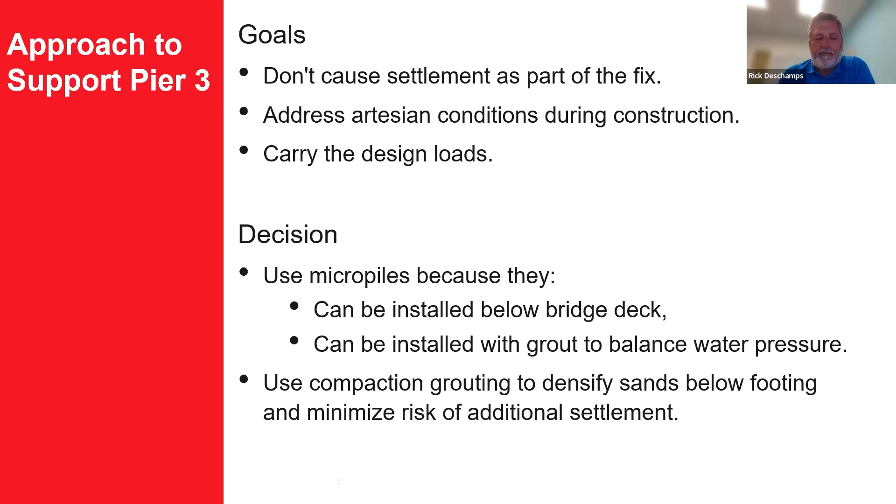When I say micropiles, there's many ways to install them. The approach we used was external flush. It's called external flush because you've got a single tube that drills down. The fluid you're using to flush through is the fluid that's going to carry the spoils back to the surface. Some micropiles are duplex, where you've got a casing on the outside. In this case, we didn't want to do that because we needed to be able to drill with grout.

I think a concept here I'd like to share, when you're drilling micropiles below the surface, is it's always important to have a head of water in your annular space on the outside that's higher than the head of water in the ground, higher than the groundwater level. The reason is your seepage tends to go from the annulus out, so you've got seepage stresses that are actually stabilizing the hole. That keeps the hole from wanting to collapse, or the ground from wanting to collapse around your tooling.

And in an area like here where you had artesian pressures, if the water level in the ground is higher than the water level in the annular space, then the seepage stresses go into the annular space, and this causes collapse and loosening of the ground.

So the reason to drill with grout is because the grout is denser. When you think about the actual head, you've got the head of grout times the unit weight of the grout, balancing the head of water times the unit weight of water. The unit weight of the grout is about 90% higher, so 190% of the weight of water, and that's where the balance comes in place to balance the water pressures.

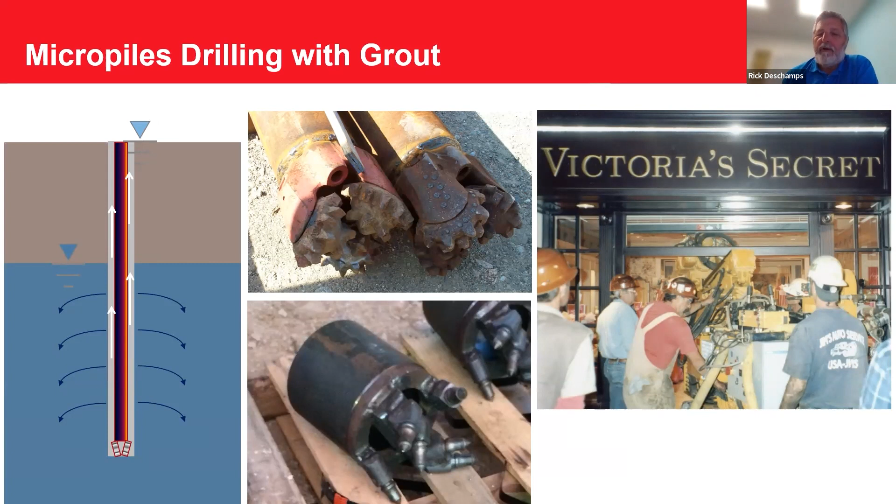So this is the approach that was implemented. Essentially a surface casing was put in place. It didn't go all the way through to break through that clay layer. It was grouted in place, and then a pipe was driven down through to complete that so the injection of the compaction grout could take place.

Once that was sealed and grouted, then the micropile was drilled back through that and installed. A bar was put in the top to carry the tension loads, and this was completed across both sides of the pier.

There were 6 piles on each side of the pier, and finally a pile cap was put on top that was tied to the pier. I'll show some pictures of that in a second.

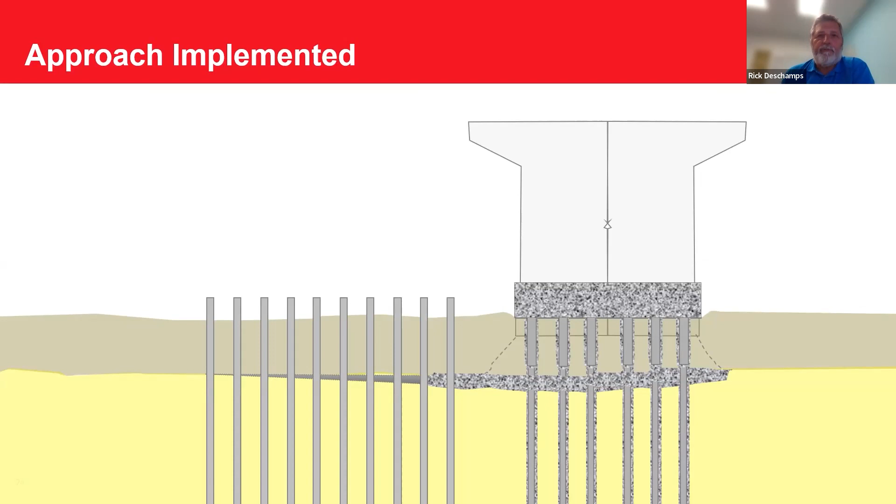A test program needed to be done. Two verification tests were done because it was logistically difficult to try to do proof testing, which was desired for the piles that were in place. So two verification tests were done, emulating the actual production work.

There's a surface casing here. This is the drill pipe that's going to go down and ultimately be the pile in place when it's grouted. This is the compaction grout that would be pumped in prior to installing the pile, and you get an idea of the bar being lowered down, what that would look like.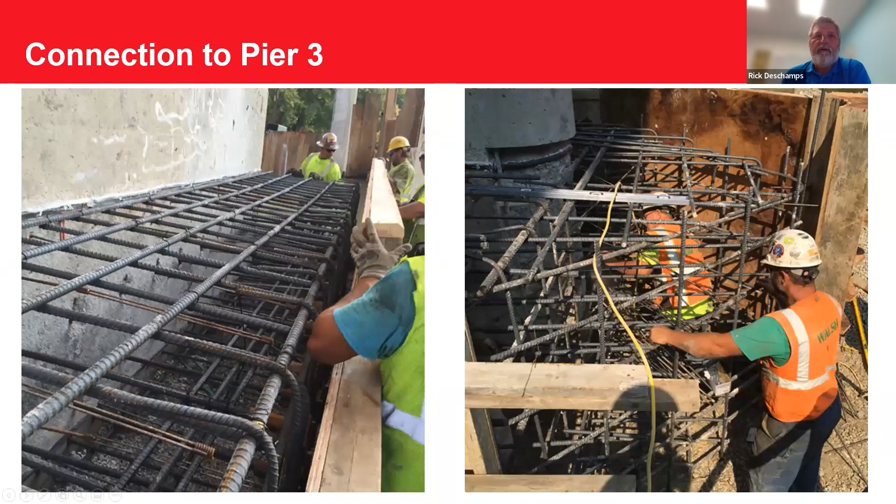Here's where the pile cap and connections are being done, drilled holes right through the existing pier so bars could go through to put the cage together. You can see the cage here being fabricated prior to pouring the concrete.

In fact, micropiles were installed for the other piers as well because there were similar concerns about the driving of piles causing a similar problem. So micropiles were used for the remaining piles for the project.

This is a proof test for pier 4 and 5, essentially using a couple of the piles as reactions. You can see the bars coming in here because they're going to be loaded in tension in order to put compression load on the pile for the test pile.

So I'll provide a summary of what I consider to be the facts: artesian conditions were identified in the contract borings and in the historical borings. Driven H-piles were shown on the conceptual drawings in the design build package, were recommended in the geotechnical report, and were installed by the design build contractor. Penetration of the clay till by the H-piles led to upward artesian flow that removed sand, and the loss of sand below the clay till led to abrupt settlement of the Pier 3 spread footing.

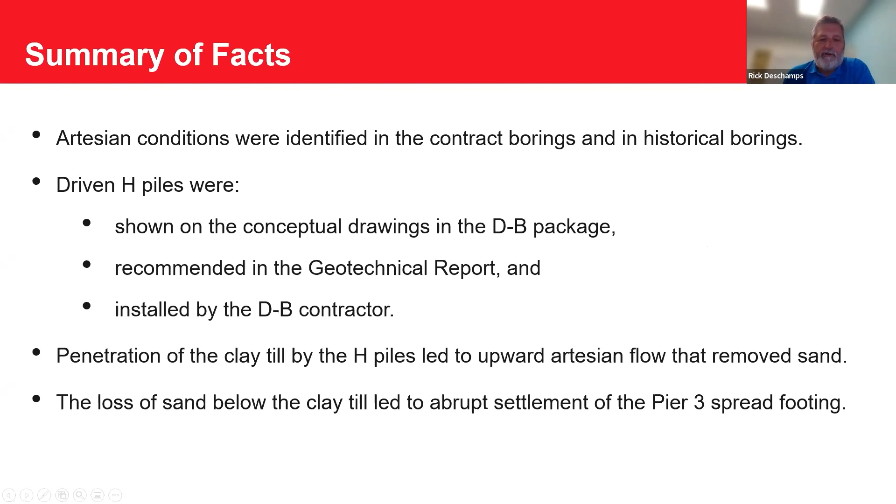I'm not sure, Ben or Mary, how to do this, but a couple of questions we were going to pose to the audience, and this is the first one: who had primary responsibility to recognize the risk of driving piles in the artesian conditions on the I-65 bridge project? What's the direction for our audience to do with that?

Yeah, so I think Mary might be populating a poll question for the audience at large, but I think this is a good sort of teaser for our next session here with our panelists and speakers. What are your thoughts on who had primary responsibility?

I just launched the poll so people can answer the question, if you want to give people a minute to think about it. Okay, very good. There's just two questions to this poll.

Yeah, so I mean, always sort of after the fact is different than in the heat of things here. But yeah, this is a real question that we deal with when making decisions during design and constructability, and what we see, what we don't see, what we pay attention to.

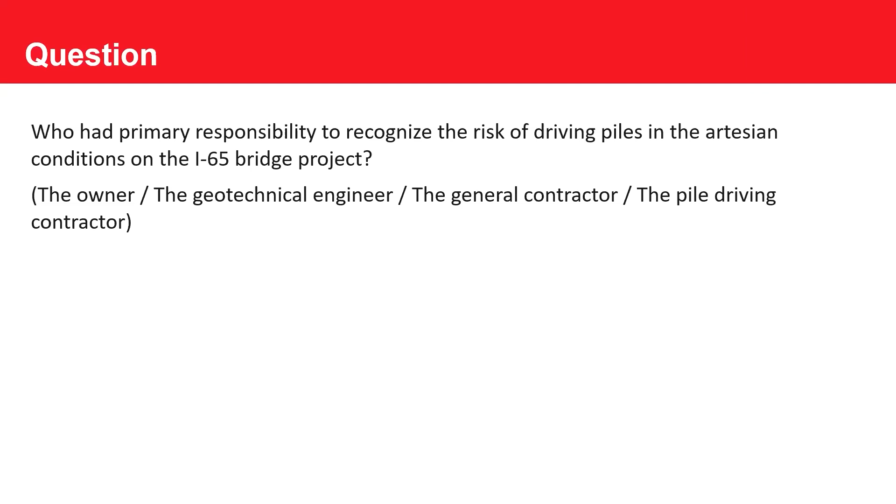There were two comments in the chat, just want to make sure we see those. Does this all go back to construction requirements to address a predicted potential scour risk, and has scour analysis been updated? Not quite understanding that question. But there was another question on whether the piles plugged during driving to give any indication, I'm not sure exactly where that one was headed, if as far as a telltale maybe of conditions.

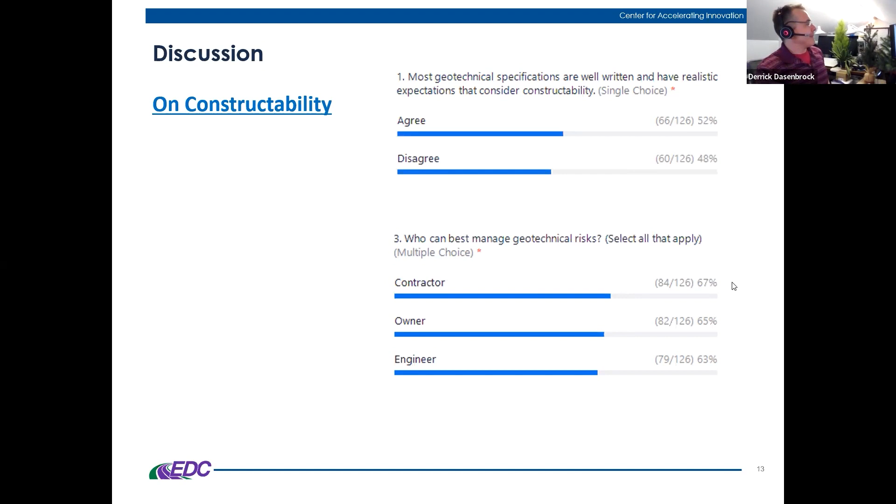If I get to say it first, I just say it depends - depends on the risk, depends when in the project you are, but it's a three-legged stool. Everybody has to work together to really do it correctly. And certainly the most successful projects are the ones that have good relationships among the owner, the consulting world, and the contractors, because you can easily come to stalemates if you don't have good partnerships and trust among all the parties.

So on geotechnical risks - geotechnical investigation for driven pile foundations is different from that for drilled shaft foundations. By a large margin, that statement folks agreed with. Any thoughts on that from the panel?

I always approached subsurface investigations knowing that we could end up putting anything in. Unless we absolutely know it's going to be a spread footing on rock, we have to plan an investigation for all of that. It doesn't matter - now I did agree with this, of course, because if you know what you're putting in then you do that accordingly. But you have to account for whatever you're going to find in forming your decisions.

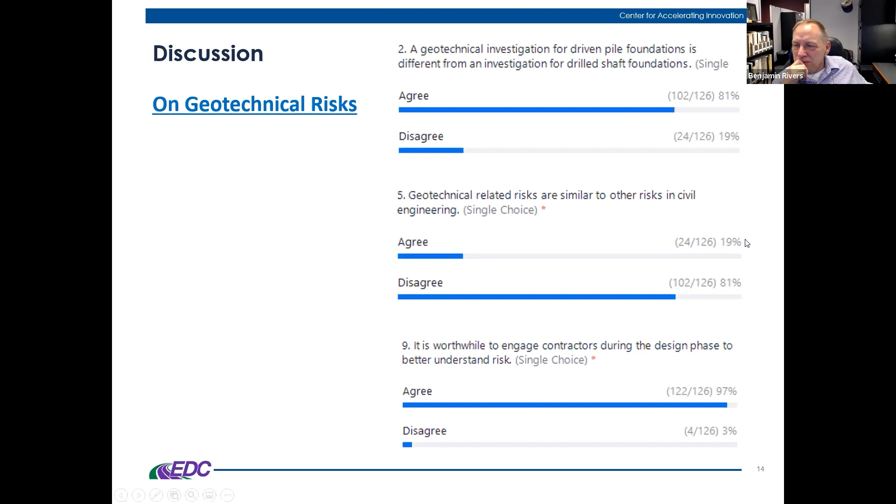So, which I think is a good segue: you never know what your production is going to be. Yeah, you don't.

Which is a great segue to contingency, and talking about contracting and the place it has compared to what we're focusing on with the A-GaME and defining things, characterizing things early. Derrick, do you want to go through these? We had a majority that felt geotechnical risk is best managed with a well-written contract, that risk contingency should be included in both the owner's original budget and the contractor's pricing.

And then relatively similar distribution about sharing the subsurface construction risk benefits. So if anybody'd like to jump in with thoughts on any of those three, or contracting and contingency or risk management, that's the theme of this slide.

I guess I would like to ask the question: what is a well-written contract? Does that mean that I've buttoned everything up and all the risk is the contractor's now and I have no risk for myself? Or what is the definition of a well-written contract?

That was not the intention of the question, Rick. By the question, we meant that it's fair and shares risk in a transparent and equitable way. I hope that's clear, but that is a good discussion point.

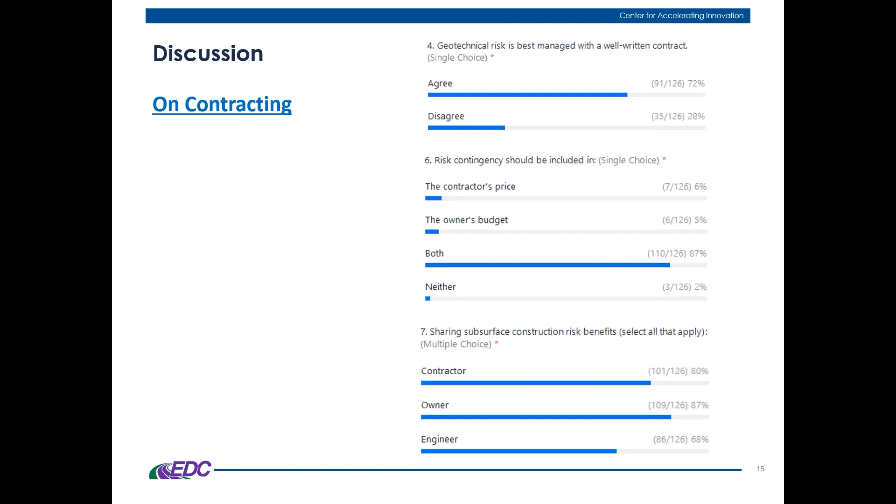I was just also going to add in, I think that the engineers and contractors, hopefully, are able to point out to owners the benefits of doing better geotechnical investigation. I think a good example is like wick drain spacing. If you do some cone penetration tests to find potential micro layers of silts and sands that could dramatically change the rate of consolidation, those might be missed entirely if you're doing 1 in 5 or 1 in 10 foot sort of standard sampling. Think of the time and material cost of being able to find out that your site is perhaps a lot friendlier than it might be otherwise.

Alternately, the other way around - nobody likes to have a bust where you suddenly need a waiting period that's twice as long with all your structural steel and everything else laying around just waiting. So I think that applies to lab testing as well.

Yeah, there's a lot of good comments coming in now. People are getting excited, this is wonderful. Go ahead, but yeah, so a couple, I'll just note some of them. They're not necessarily questions, but...

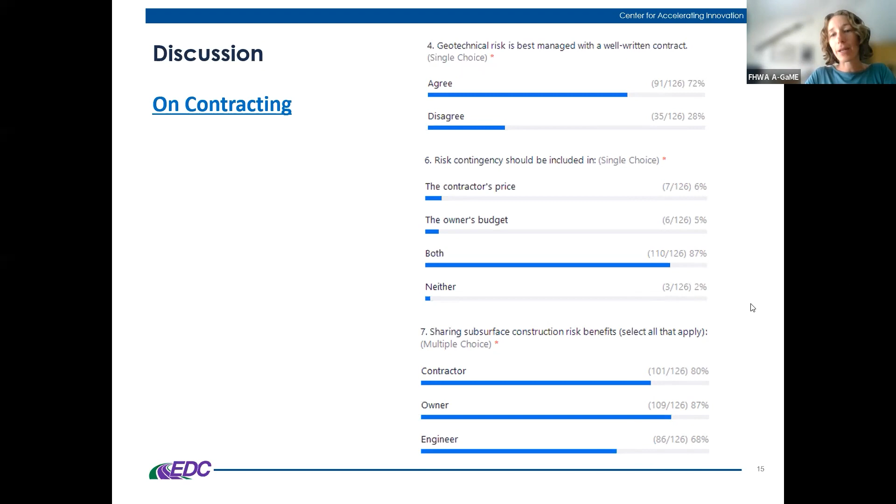Somebody pointed out, Charles Gove pointed out that we are preaching to the choir here, and investigations are going to the lowest bidder. And Alan pointed out that geotechnical engineers can't expect others to make the case here. We will need to be able to explain the need and value or risk to justify a good exploration and analysis program.

I mean, this is really what the A-GaME is all about, right? We're not as focused on high quality lab testing, but maybe that should be the next EDC.

Well, to be fair, I certainly am an advocate for quality investigation and quality lab testing. We've been focusing on the A-GaME, but that doesn't preclude FHWA's stance on quality investigation and getting quality samples. Right now practice is hollow stem auger throughout most of the country, but recognizing that effect on sampling is not really there's a trade-off, right? The speed of investigation using a hollow stem auger versus the quality of information we get with rotary wash. We do need to preach quality investigations.

So I'm very happy this is coming up, because, like you're alluding to Mary, being part of the second part of the A-GaME. Yeah, you're spot on. We've been focusing on underutilized methods, but the fact that we have methods that have been used for years and not done to the quality level that we need is something we need to focus on, and I'm glad to hear it. Yeah, it all goes hand in hand.

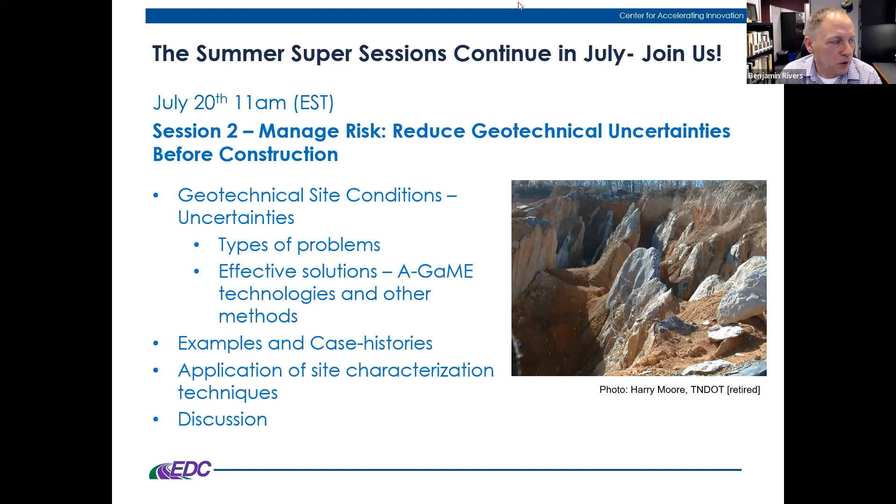So please join us for our next session, July 20th, at the same time that we started here at 11 a.m. So yeah, final thoughts.